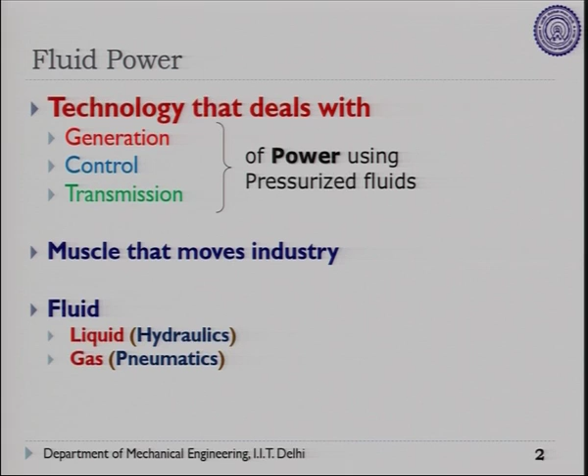In between that you have to exercise the controls. So we will be discussing generation, controls, transmission, and in between there is a control of power using pressurized fluids. When we talk about liquid, we call it hydraulics, and whenever we talk about gas, it is pneumatics. So let me just pose a problem to you.

In this case, sometimes it may be a conveyor, or sometimes it may be a different system. So this is basically a simple problem. If I have to attempt this, if I have to design a system for this, how can I proceed?

So I just want to have some input from your end, then I will guide you. If I have to design a system like this, where I have boxes stacked, I need to control two actuators, definitely two cylinders in this case, and then it will push it.

Then after the first cylinder extends, I have to extend the second cylinder. I am just talking about the common approach.

So let me talk about the system. So I need to have some source where I have to generate the fluid power. So then, let me start with a pneumatic system.

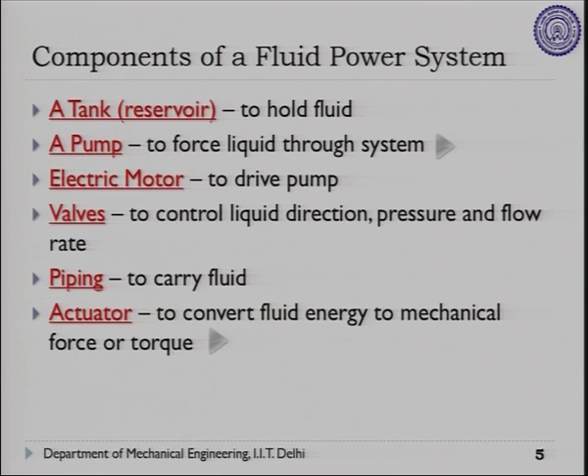So let me take a quick look at this. So hydraulic system, if you see, I will be starting with a reservoir, then there is a filter required, then there is a pump driven by electric motor. You require some kind of a pressure regulation. So pressure regulator is there or relief valve is there. After that you will be having a control valve. So there you have options to control the system.

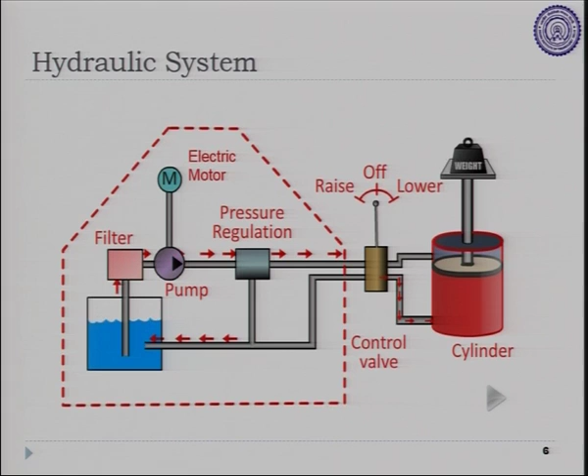There are 3 options shown over here: raise, off and lower, and then you will be having an actuator which is doing the actual work. So it is a conversion of a fluid power to the mechanical. So this is a basic hydraulic system, and if I just take you to the pneumatic system, the only change you can see here is compressor, and after that you will be storing the compressed air. So reservoir is coming after the compressor, right, and then you require something for treatment of the air.

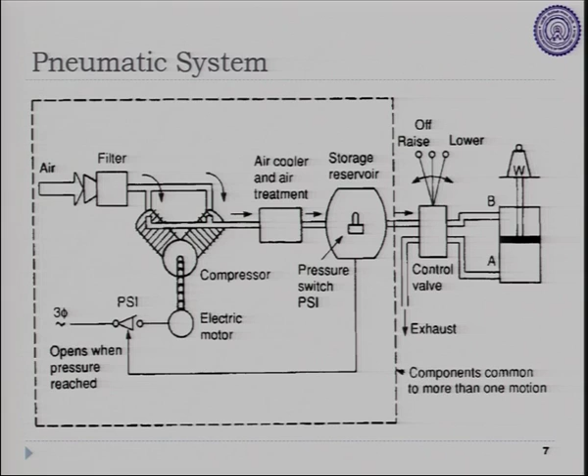Why we need to treat air? Impurities. And what are impurities? What is the major impurity in the air? Moisture, correct, because it will clog the valves and damage them. So we need to take out the moisture and push the dry air into the reservoir, right? So I think that is the common pneumatic system.

So let us come to the control components. So 3 basic types of control devices. One is to control the direction, so we require direction control valve, right. Second is to control the pressure, so we require pressure control valve to protect the system, to limit the pressure in the system, and third is to control the speed, we require flow control valves, right. Let me just quickly show you a small video here.

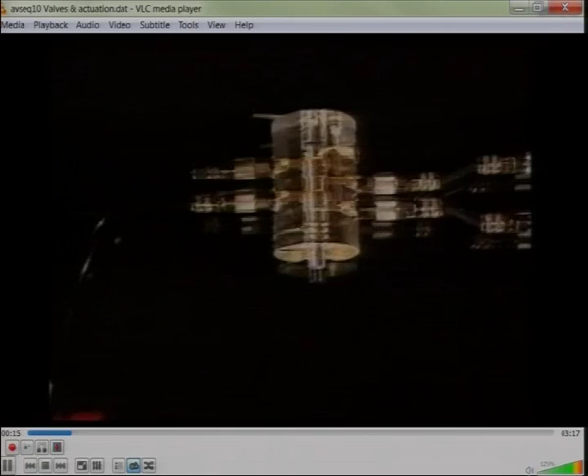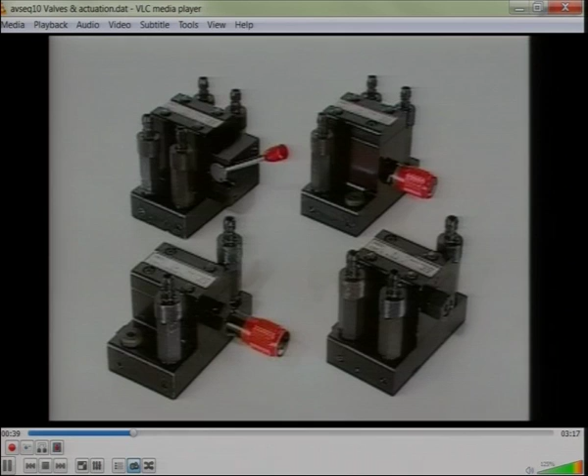Designing a hydraulic system, we saw that between the power supply unit and the drive unit... So this is the actuator, and then there is the valve. The power control section makes sure that the system actually performs the functions for which it was designed. Valves are the components in the system that control the energy flow, that is, the oil flow. This makes them a kind of interface between power supply and the drive unit.

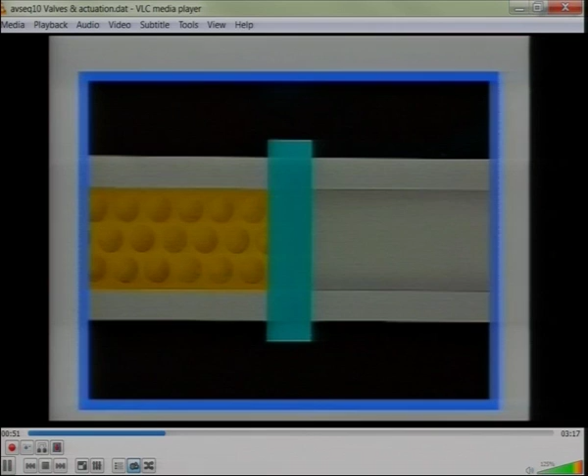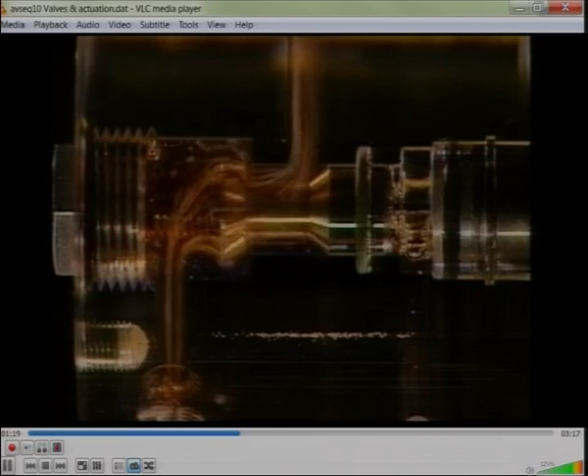They open the flow path or they close it. They direct the oil flow. They regulate flow rate and oil pressure. Valves come in the form of poppet valves. So this is a poppet valve, you can see the way it has opened, now it is closed. So there is a moving element which rests against the seat, and then there are slide valves, a spool type of valve. So by just sliding the spool you will be able to block and open the ports, right.

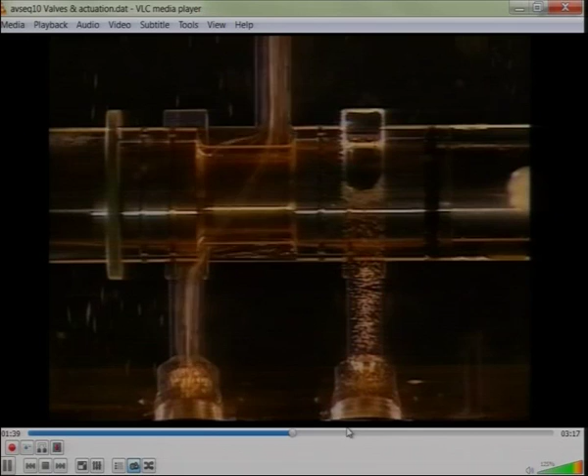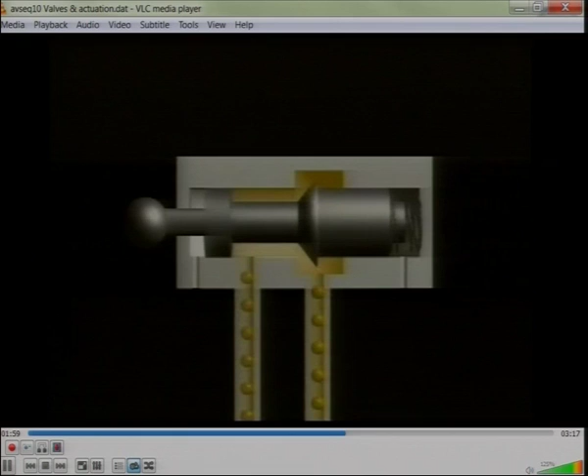In poppet valves, a sphere or cone is pressed onto the valve seat, closing off the flow passage. Poppet valves are tight sealing and designed mainly as 2- and 3-way valves. In slide valves, pistons open or close flow paths by moving back and forth, thus sealing off or opening bores. The piston needs a certain amount of tolerance, which is why this type of valve doesn't seal as tightly as poppet valves, so they're only used for pressure of up to 315 bar. Slide valves can open or close several flow paths at once.

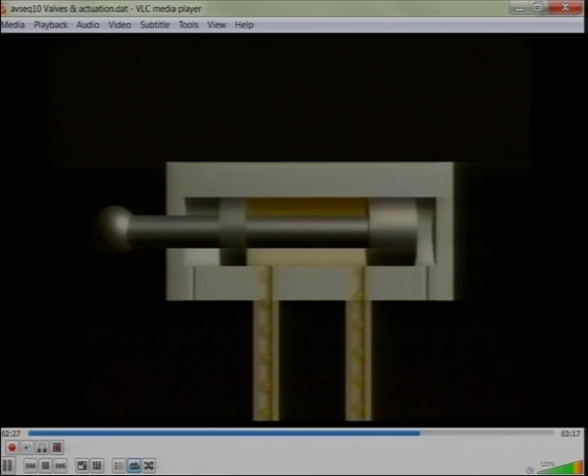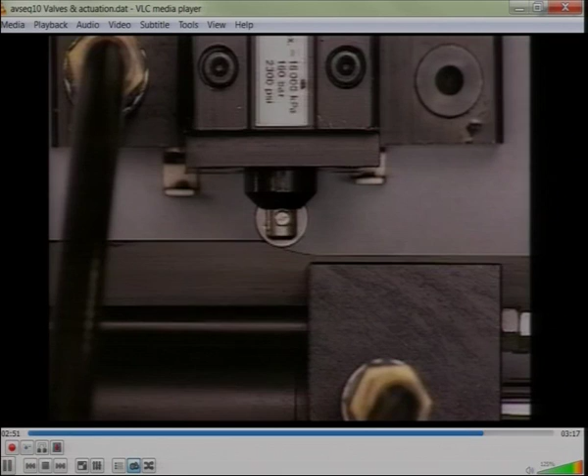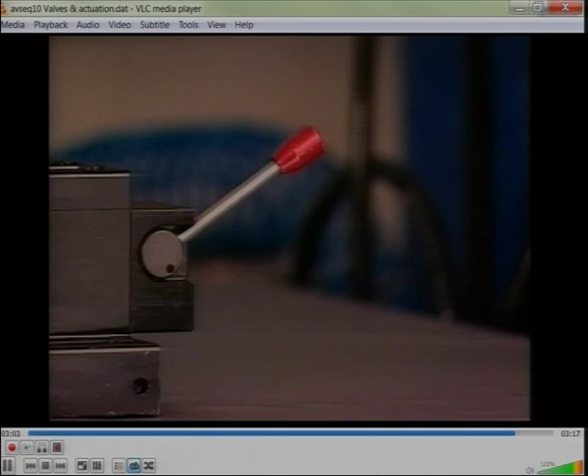There are various ways of actuating hydraulic valves. Manually by lever, or by foot pedal, mechanically by roller lever, or by spring, or electrically, as in the case of these solenoid valves.

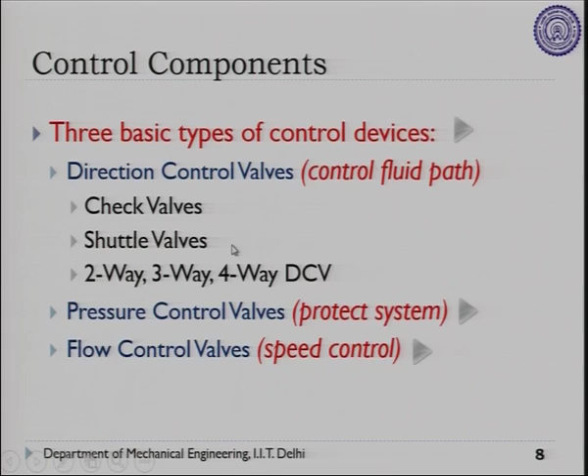Fine. So you have seen the direction control valves. Let me just take you to the slide now. So when we talk about direction control valve, we are trying to channelize the flow of the fluid in a particular direction. So if you see here, there is a spool of a variable diameter, and whenever you slide this spool, it will be opening and closing the ports on the valve body.

So there is a valve which has a body on which there are ports where you will be connecting your outside elements through tubings, and there is a spool inside it. So whenever you slide the spool, you will be able to open and close the particular ports of the valve. You have already seen these modes of actuating the valve. There is a manual mode through lever. Mechanically you have seen through the roller.

Now let me just quickly explain the symbol, how to make a valve symbol. So that will be useful for you. First thing is position. How many minimum positions can the valve have? How many maximum? 3. So a valve can be either a 2 position or 3 position. It means that the spool inside the valve can have either 2 positions or 3 positions. So depending on the number of positions in the valve, we will be making the number of boxes in the symbol. So let me just quickly draw that.

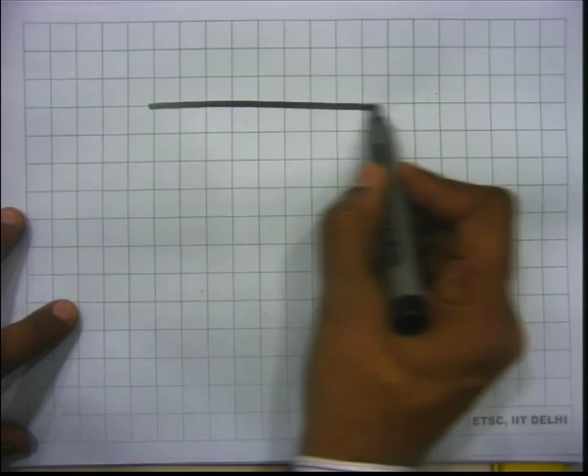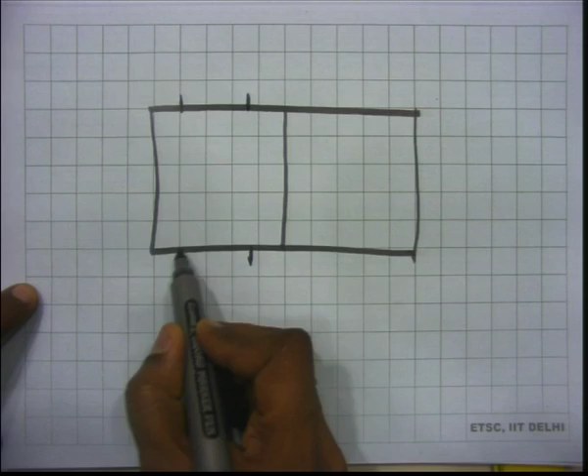If I have to make a 2 position valve, I will be making 2 boxes. It means 2 positions I am representing by a symbol. So it is a 2 position valve. Then there are certain number of ports on the valve. So that will be denoting ports on the valve. So suppose let me just draw 4 ports on this valve, through which you are connecting external elements to this valve.

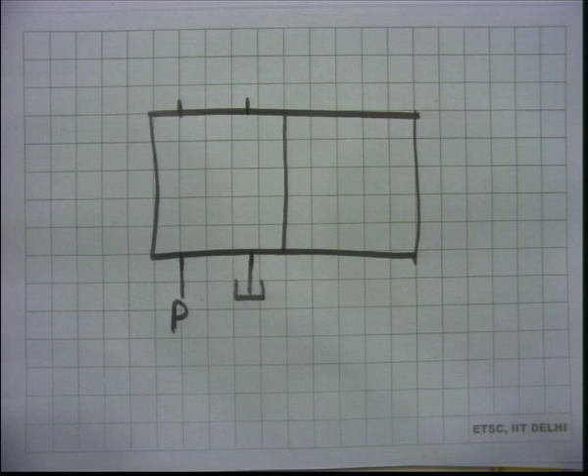Out of these, the 2 bottom ones: through one you will be delivering a pressurized fluid through the valve. So I will be connecting this to the pump, and we call it P. So pressurized fluid is coming inside the valve through one port, and on the other side you will be draining the fluid back to the reservoir. The other 2 ports of the valve will be used to connect to the actuator. So then you can have an actuator, and then I will be connecting these 2 ports to the actuator.

So whenever we draw a valve symbol, we always try to show connections to these ports in a default position. That is the first thing you should understand. So when I draw this valve symbol and I have connected actuator and pump on this side of the symbol, it means this is the default position of the valve. We always show connections to the default position. So whenever the system is not in operation, whenever your circuit is not working, or when the valve is not actuated, this is the default position of the spool.

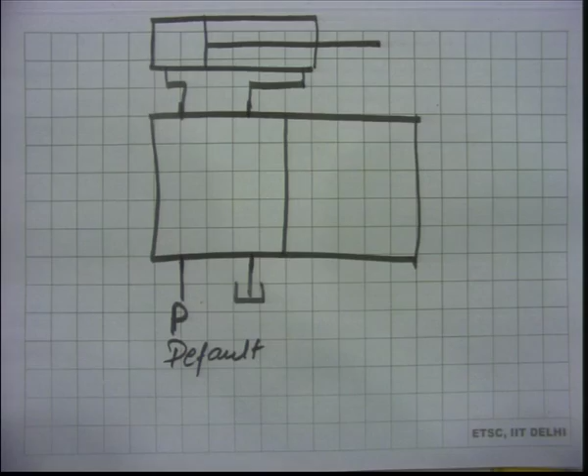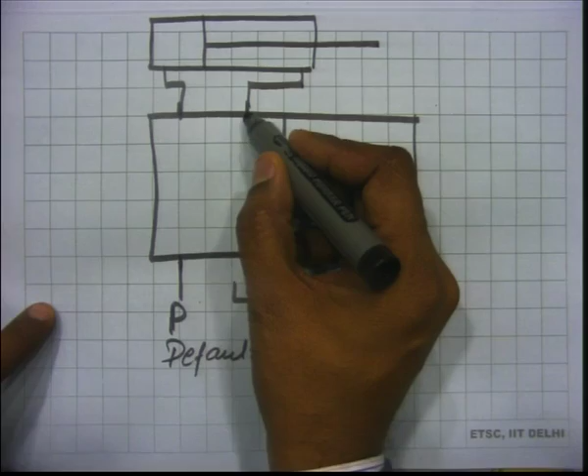There is another box shown over there. This box shows the actuated position. Now, what is the difference between the default position and the actuated position? What exactly gets changed? The direction of flow will get changed. So, if I have to retract the cylinder, in a default position, can I draw the arrows inside this? So if I want to retract, I will be connecting the pump line to the other side of the cylinder and then draining the other side of the fluid to the reservoir. So, I will draw arrows like this.

It means that in the default position, the pressurized line gets connected to the rod end of the cylinder and the other side of the oil will come back to the reservoir. So whenever the system starts, it will retract the cylinder. What would be the symbol inside the other position? Can you draw on your sheet? Yeah, parallel lines, and especially the direction of arrows I want to see. Just do that, because if you understand this, you understand the valves.

We are not marking any port on the other part of the symbol. We are assuming that those 4 ports are fixed. Now, if you just correlate with the physical component, the valve body is fixed, valve ports are fixed, they are not going to change. Only thing that is moving is the spool inside the valve, right. So, the changed connection when the spool moves to the actuated position, we will be drawing those arrows into this.

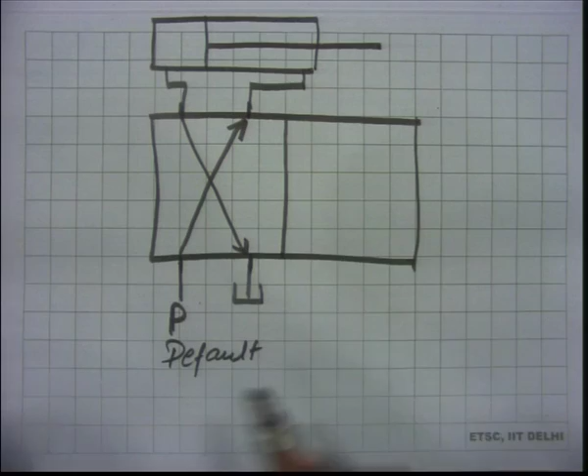So, first position is basically to retract the cylinder and in the actuated position I want to extend the cylinder, right. To extend the cylinder, we are assuming that pump is here, tank is here, it is already connected. So, pump will provide pressurized fluid onto the piston end of the cylinder and at the same time I will be draining the oil from the other end to the reservoir.

So, when I draw these 2 arrows on the second position, that is the actuated position, my valve symbol is complete. So, that way by just looking at the symbol you can understand what is the direction of flow when the valve is in default position and when the valve is in the actuated position. You can understand the motion of the actuator with this, fine.

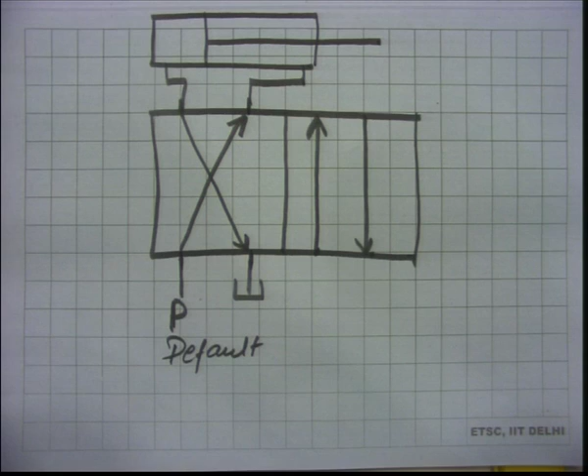Now, what is missing on this valve symbol? Yeah, mode of actuation, how this spool is getting shifted. So, there are 4 modes as I have shown in the slide. You can denote the actuation on this side of the symbol. So, if I am going to control this with the pilot pressure, I will be making a dotted line and similarly I will be making a dotted line on the other side. So, this is one mode of actuation.

Same way you can have a solenoid symbol on this side. So, wherever you are having this actuation, that particular position is controlled by that actuation, fine. So, this pressurized line will be making this side of the connection, and whenever the pressurized line is connected to this side, then these are the connections made, fine. So, that way you have to draw a valve symbol depending on the positions.

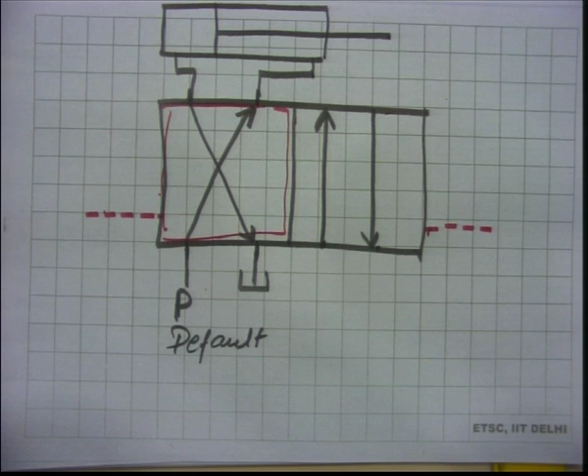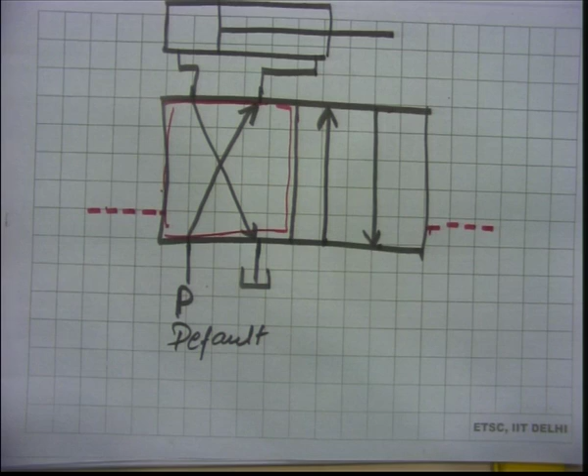Now, if I have a 3 position valve, what is the third position? Center position. So, one is left, another right and third one is the center, it is a neutral position of the valve, fine. Because in this case you cannot stop the cylinder in between, you will be either extending or retracting. There is no third option. If I am lifting a load, I cannot stop in between somewhere, there are only 2 options available.

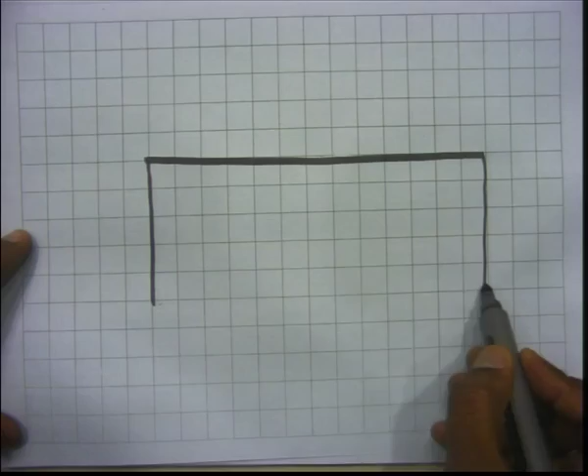So, sometimes we require to hold the load in between and for that we require a third position, fine. So, let me just draw a 3 position. Can you draw on your sheet the 3 position valve for the same task? So, once we know there is a 3 position valve, we will be drawing 3 boxes. These 3 boxes denote the 3 positions.

So, where exactly will we draw P, T, A and B? Center, because that would be the default position. So, I will be drawing P, T and then A and B. These are the 4 ports on this valve. So, I will be drawing like this, right. And then these 2 left and right positions are the actuated positions.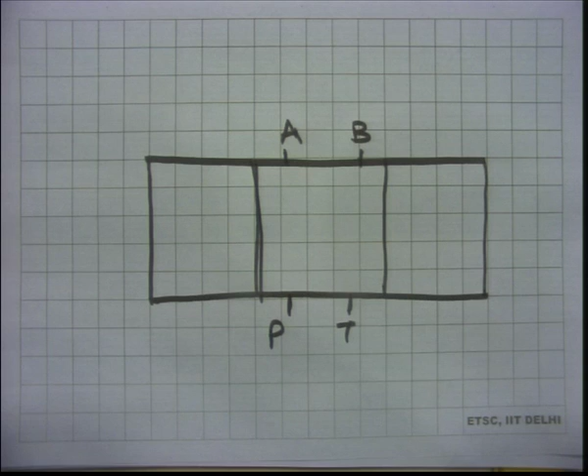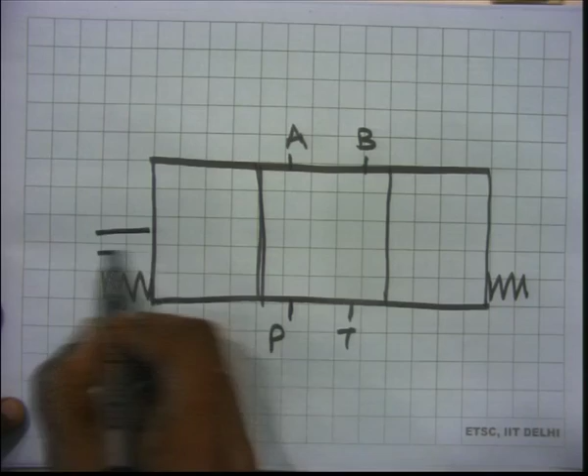So, how is the spool maintained in the center position? You require two springs at the two ends of the spool. So, one spring will be on this side, another spring on this side, right, and then you can have a manual lever for this. So, I will be drawing the manual actuation, or there may be some other type of actuation. Because of the two springs on the spool, the neutral center position is maintained, fine.

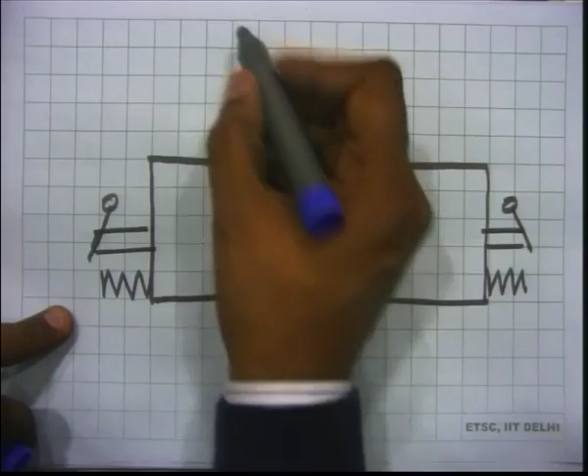Now, can you draw the arrows inside these three positions if I am having an actuator connected to A and B? Can you just draw that? Please complete this valve symbol, so that I will be stopping the actuator in between whenever there is a neutral position, and of the other two positions, one will be extending. So, I can write this will extend the actuator and this will retract the actuator.

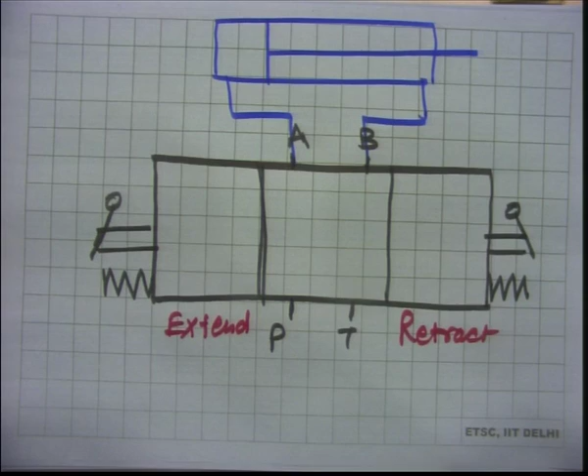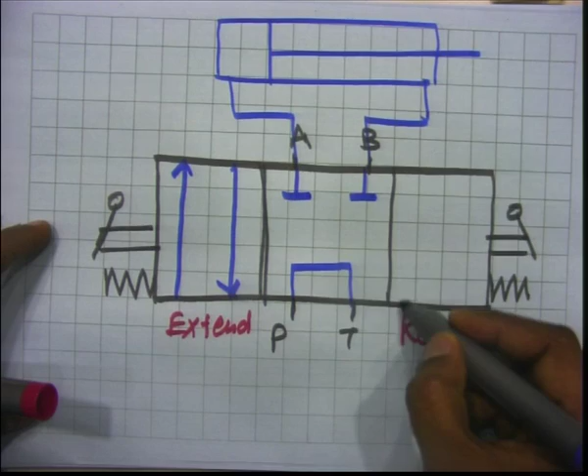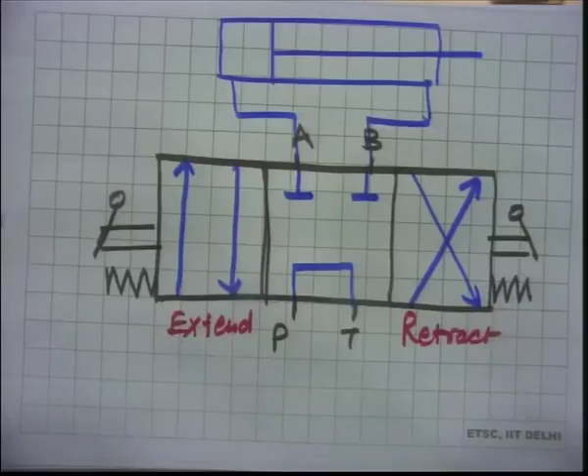Done? Done? So, this is what I assume you might have drawn, fine. So, now you understand how to draw a valve symbol, it is quite easy. Nomenclature we need to understand. When I say 4 by 3, what do you understand by a 4 by 3 valve? Yeah. So, first, can you name this? This is 4 by 3.

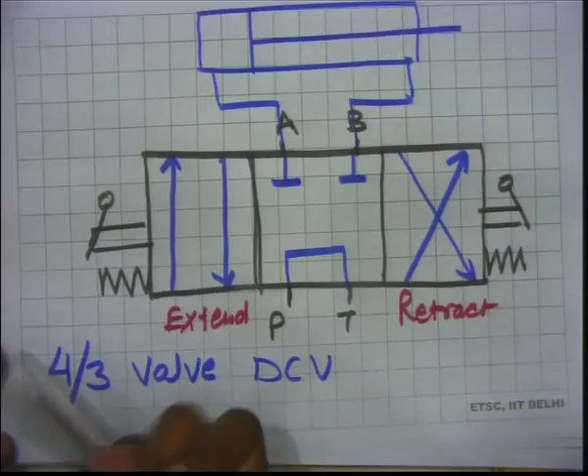DCV, it is a direction control valve. 4 by 3, 4 denotes the ports. So, the first number denotes the number of ports on the valve, and the second number denotes the number of positions of the valve, correct.

So, 4 by 3, by just looking at the valve you can see the number of ports. Can you see the positions inside the valve? Can you see position inside the valve? Yeah, so that is the reason that symbol is always there on the valve. So, whenever you do lab, please have a look at the symbol on the valve, then you understand what exactly this type of valve is. So, how many positions are there inside the valve, fine. So, this is clear, direction control valve you now understand.

Let me come to the circuit, or I should say control system. So, when we say hydraulic and pneumatic control system, what exactly are we drawing in the circuit diagram? This is basically a signal flow in the pneumatic system or hydraulic system. There are certain inputs it requires, either in the form of a valve, push button valve, or maybe a control valve. So, some signal inputs are there, then you will be combining these signals together, doing some kind of processing, and then the decision will be communicated to a signal output section, and finally the command will get executed, fine. So, this signal output is basically communicated to the direction control valve, fine.

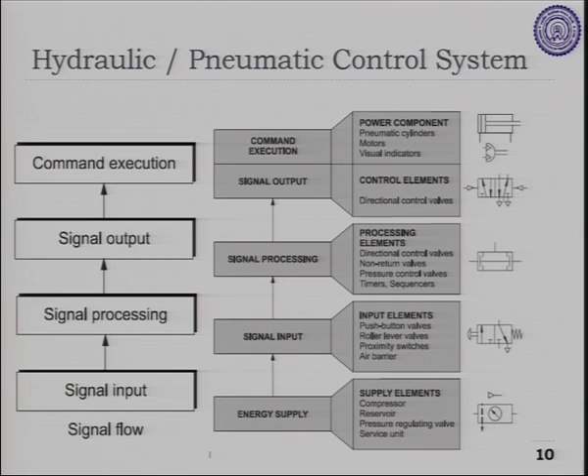See, in electropneumatics and pneumatics, the power section will remain same. Power section means the fluid power section will remain same. That is the reason we are saying pneumatics and hydraulics. Only the signal control section will change, fine. So, the power section will remain same and the signal control section will change, meaning how you are combining the signals and how you will be communicating the signals, right. So, that will get changed.

What is the interface between the signal control section and the power section? What is the interface between a signal control section and a power section? See, as I mentioned, the power section is basically the fluid power section, and what is the component between the signal control section and the power section? That is basically whatever you are communicating as a decision, and it will be an interface between the signal control and power. Which valve? Solenoid valve. Direction control valve is basically the bridge.

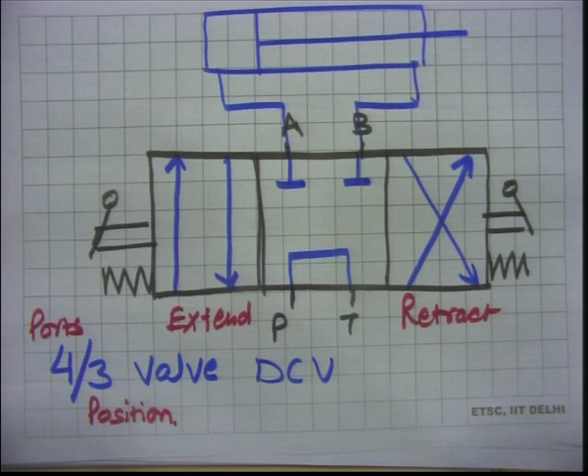Direction control valve is basically acting as a bridge, because through the direction control valve we are providing pressurized lines. If you see here, these two are the pressurized lines connected to this direction control valve, and at the same time we are also communicating the signals. In case of manual actuation, signals come in the form of manual force. Whenever I control the direction control valve movement with pressurized fluid, that pressurized line communicates the signal, and whenever I use electropneumatics, I will be using solenoids. These solenoids communicate the electrical signals, moving the spool inside the direction control valve, which will control the power section.

So, the cylinder is on the power section side, so it will be moving back and forth, but the control of that cylinder will be done by the direction control valve, and the signal control section is communicating the decision to the direction control valve. So, the DCV is basically acting as a bridge, I should say interface, between the power section and signal control section. So, that is the idea of showing this figure.

So, let me quickly show you a circuit. Now, you can see all the components marked over here. There are supply elements, or I should say generation elements, in the circuit diagram. Then we will have some input elements. So, what are the input elements in the pneumatic system?

Input means how you will be communicating your inputs to the system. Compressed air you are not going to provide. Push button valves are there. So, when we say push button valve, why am I not saying push button switch? See, because when we talk about pneumatics and hydraulics, it is always a valve.

Valve means the same direction control valve, where you will be having some incoming lines and some outgoing, and then you will be applying a force or some kind of input. So, push button valve means through the push button you will be moving the spool inside the valve, and that will be controlling the output from the valve. So, then you will be having input elements: push button valve, roller valve.

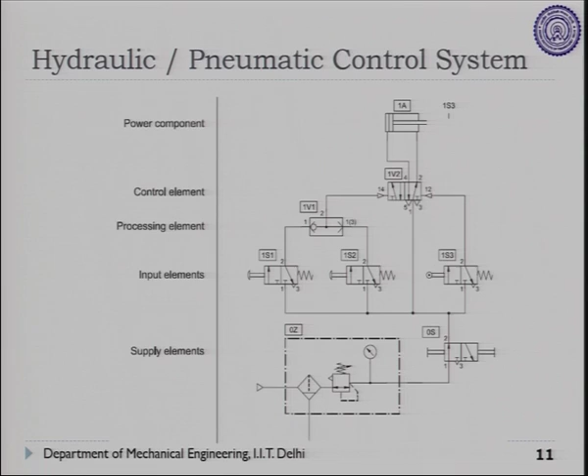Let me show you a more realistic circuit diagram over here. So, if I have to draw a circuit diagram to control the movement of a punch, so that I can make a shape, sheet metal deformation. So, in this case you will be having a reservoir, starting with the symbol of a reservoir. I am just explaining how to draw a circuit diagram.

So, in this case you will be starting with a reservoir, then you can draw a strainer here, there is a pump, there is a motor, then finally you will be taking this to the direction control valve, and the other side of the direction control valve is the actuator, and then you will be having some punch connected to this, and there is a die on the other side. So, let me just come to this diagram, and the red button you can see now.

You have to basically draw the symbol of A, the symbol of B, and the symbol of C. For your help, it is already mentioned that A is basically a 5/2 pneumatically operated, or I should say pilot operated, direction control valve. So, it says 5/2. Then the push button valve is 3/2. So, B is a 3/2 push button valve, and C is a 3/2 roller valve, roller lever valve.

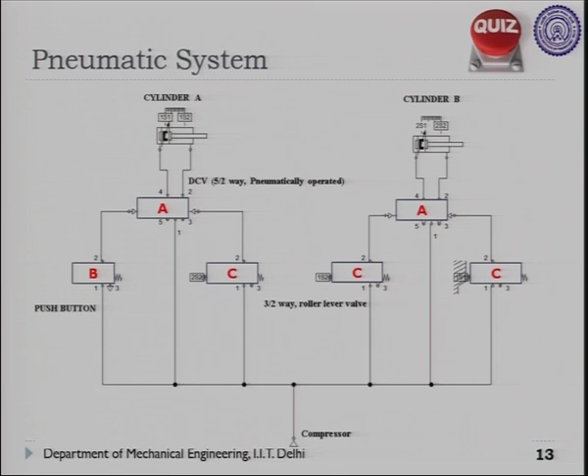So, this is one that is coming from a compressor. If you see here, there is a compressed air line coming to this valve as 1; 2 and 4 are on the cylinder side; 3 and 5 are basically exhaust. So, the same 5 ports you can see on the other position also. So, this is the default position in this case, and then you can have another position here also. So, just make 2 divisions of this.

When I say push button valve, it is basically 3/2. So, there are 3 ports, 1, 2 and 3, right, and it is 2 position. So, you have to draw arrows inside this.

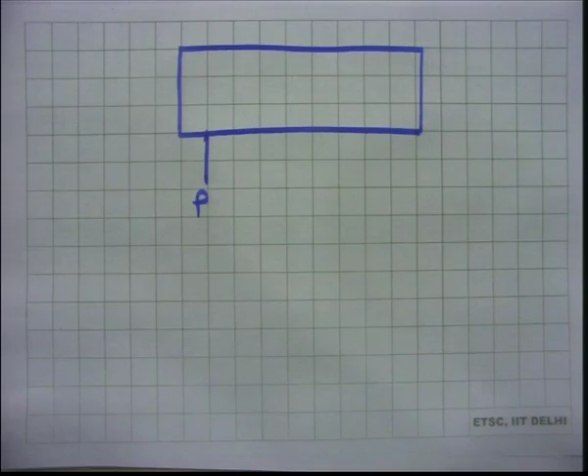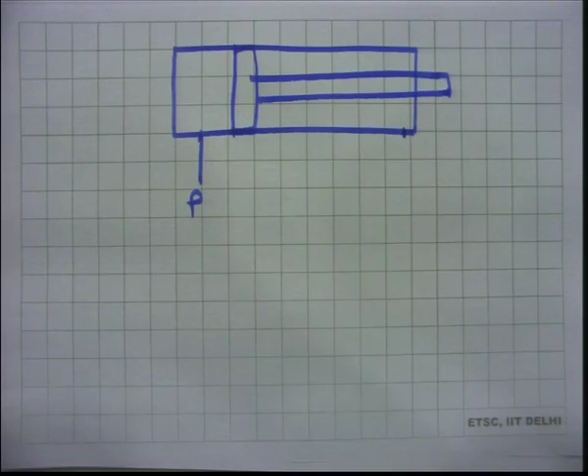Single acting is basically, if I show you here quickly, we will have only one port to make the oil flow inside the cylinder, or the pneumatic line is only one. So we will have only one line on the cylinder, and the other side you will only have a bleeding port or exhaust, whatever you can say. So if something leaks out, then it can, otherwise you will not be able to move the cylinder. So this is basically single acting, because you have only one pressurized line connected to this actuator.

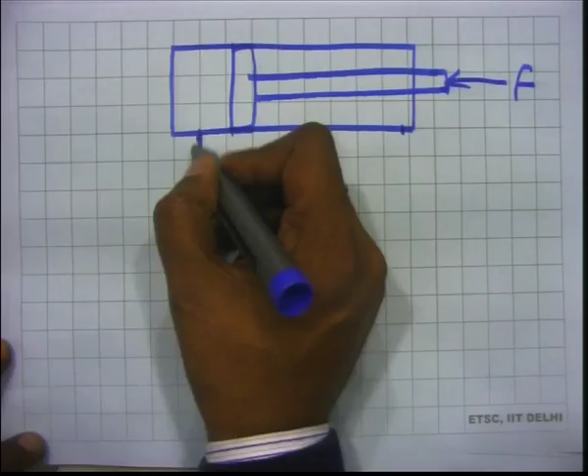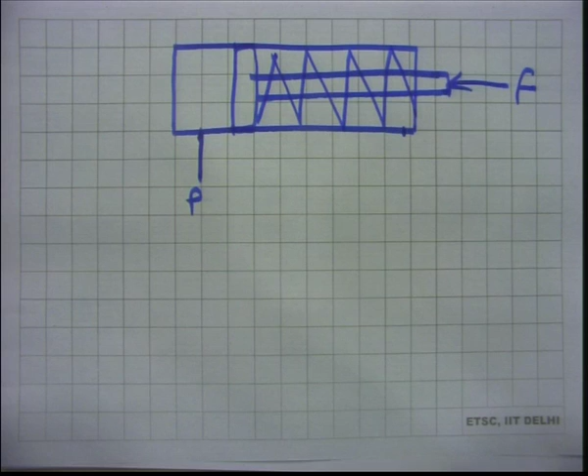So if I have to extend, I have to provide pressure to this cylinder, but how will I retract it? Suppose if the spring is not there, because of the load, because of the external force, it will retract. So there will be an external force on this side which will push the piston inside the cylinder. So I can only extend this, and the retraction is with the help of a force. That is one case. Another case, you have correctly identified, there will be a spring on this side. So whenever you provide a pressurized flow inside the cylinder, it will compress the spring, and as soon as you release the pressure, it will go back. So that is the single acting cylinder.

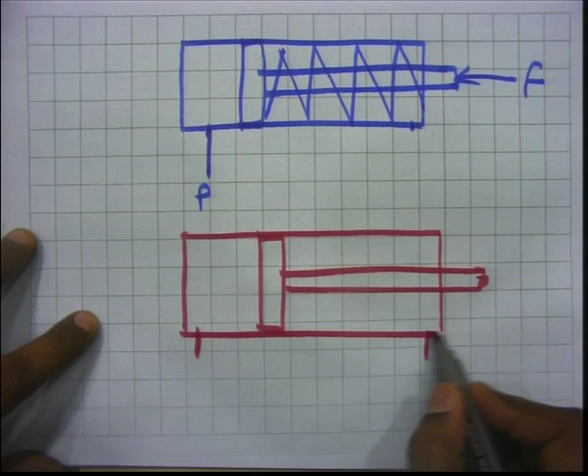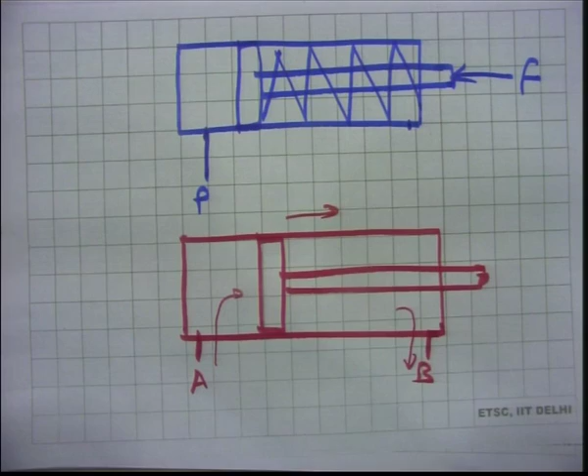In case of a double acting cylinder, we will have two ports, so that we can freely control the movement of the actuator. So I will have two ports onto this cylinder, A and B. In this case, whenever you are making oil flow from A inside the actuator, I have to drain the oil from the other side, and this will extend the actuator. Whenever you want to retract it, you have to make the oil flow from this side and it will come out from the other side. And that is the reason you have seen that in the direction control valves you will have A and B, both ports are there.

But in some cases, if you see here in 3/2 valve, if I show you here, in the 3/2 there is only one line coming out of the valve. So normally we will be using that to control the pilot line or for single acting cylinders. So 3/2 normally we use to control single acting cylinders, and whenever we have double acting cylinders, we will be having 4/2 or 4/3. So that is how different actuators work.

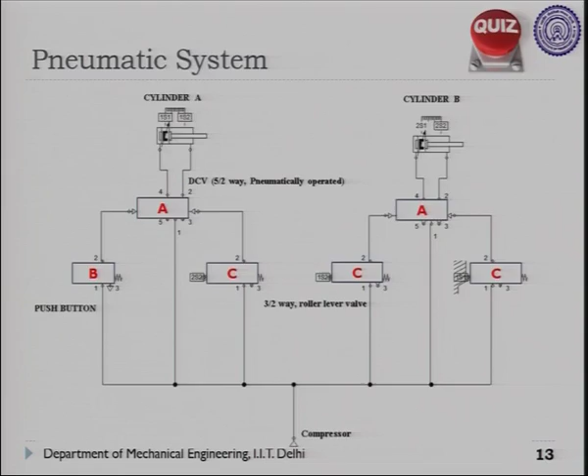Now we will quickly have a look at the design parts. Functional requirement is one part, because we have to identify the suitable control valves and connect them the way we want the functions to be performed. So you will be drawing the reservoir, a strainer, a direction control valve, and finally the actuator. So all hydraulic and pneumatic circuits look the same, only depending on functionality you will be selecting different type of control valves. Now once I have the functional design available with me, once the functional design is ready, how can I identify the specification, how can I freeze the specification of different components?

Suppose if I take an example of this system itself, if I have to design a press and then design a hydraulic system for this particular press, how will I finalize the specification of the actuator, what pump will be required, how will we decide the specifications of the pump, and the direction control valve we have already decided. So we will start with the specification of the job. So suppose if I ask you to design this system, what exactly do you require, what exactly should you know? Force. So specification of the job is one thing that you are knowing, or it may be given to you as a specification. Now after that you have to calculate or find out.

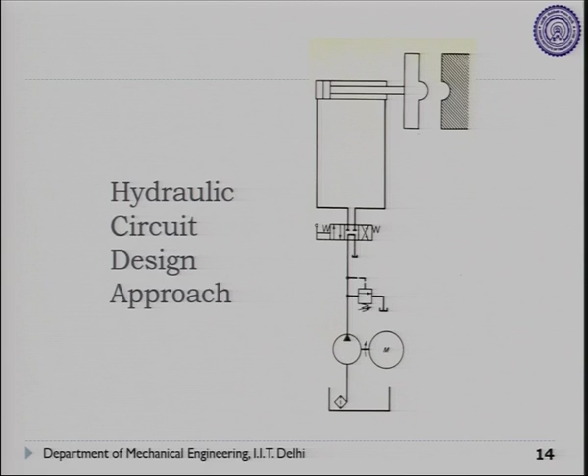So, these are the two specifications, one is the bore dia and another is the stroke length. These two things you have to find out. How can you find out those specifications? Let me just give you a problem, since we have shortage of time.

Please write down this basic specification given here in the same circuit which I have shown you. A sheet metal forming press, as I have shown, there is an actuator, a punch and die. The shape is to be formed as a hemispherical cup of radius 15 centimeter in 2 mm thick mild steel sheet. Force required is 8 kilonewton in this case.

The forming hammer should approach the job from a distance of 30 centimeter. So if I just see that, I am having an actuator, this distance of approach is 30 centimeter, and the production rate given is 240 components per hour.

Now I have to identify the specification of different components required to make this circuit. So from where should I start? Let us freeze the specification of the hydraulic cylinder. As identified, we need to know the bore dia and the stroke length, so two variables are unknown in this case.

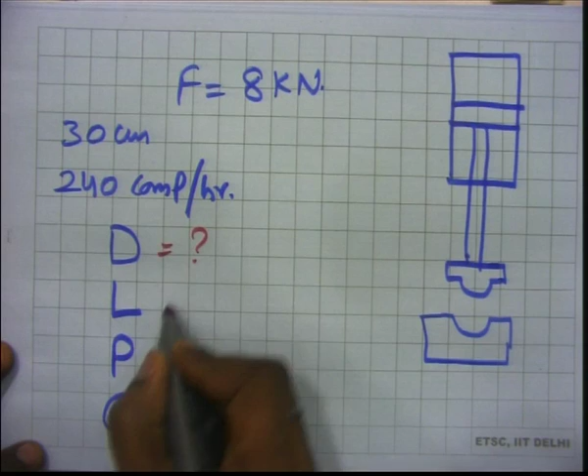It is very basic fluid mechanics, I am not going into detail. So I know only force, in this case 8 kilonewton is required. Now in case of an actuator, either I should know force and pressure, or I should know the dia. So one has to be frozen, out of these two parameters I have to freeze one.

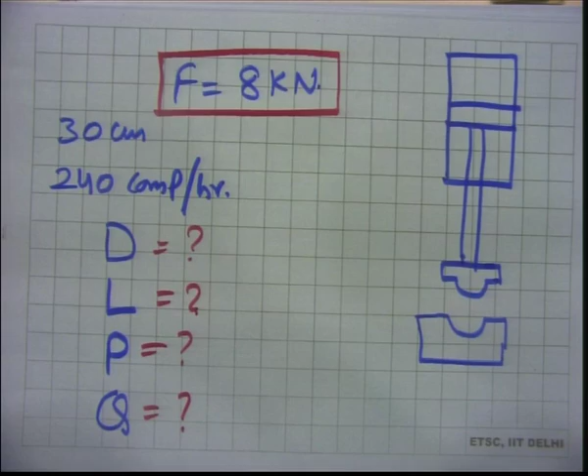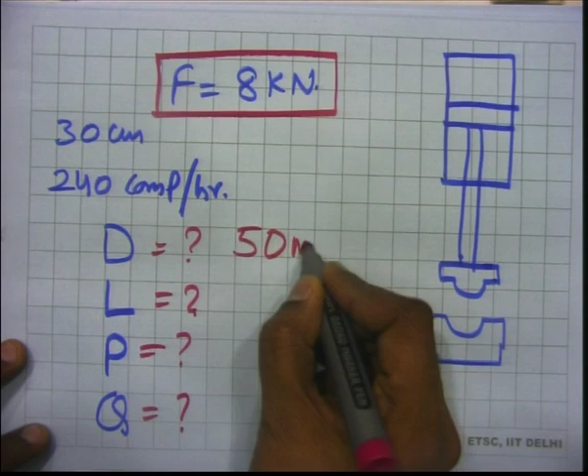We can start with an assumption, whichever is available. Suppose if I already know the pressure I have to work on, I will start with pressure; if I don't know the pressure, I will start with an assumption on bore dia. So let us start with an assumption of 50 mm. I can assume that bore dia is 50 mm, so I will select a cylinder with a bore dia of 50 mm.

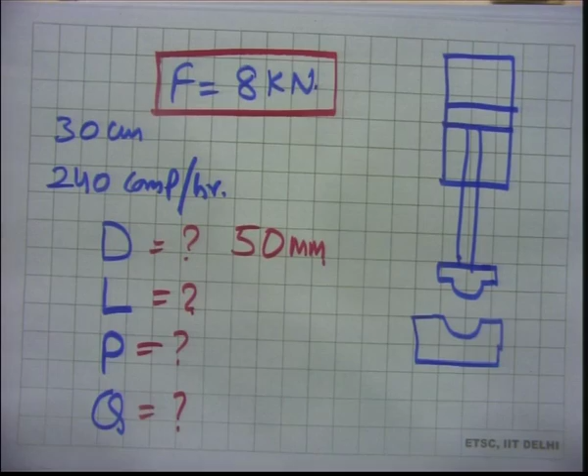As I mentioned, this has to approach from 30 plus 15 centimeter, since this has to be approached from 30 centimeter and the radius is 15. So total travel that the cylinder has to make is 45 centimeter. So I will make this 45 centimeter the length of stroke.

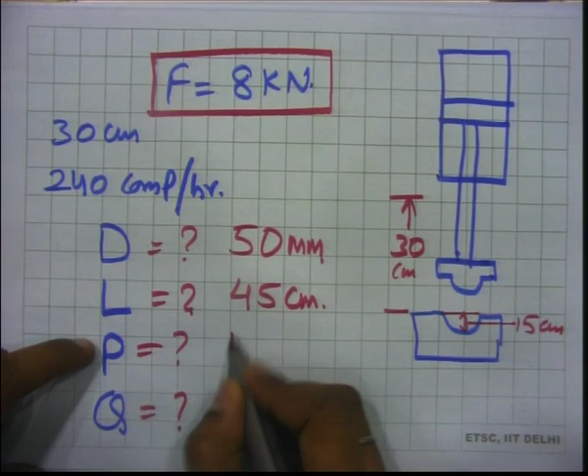Now from this, pressure can be easily found out once you freeze the diameter of the actuator. What would be the pressure? You can just find out force divided by area. Force is known, that is 8 kilonewton. Area you can find out from the diameter known. So pressure can be easily found out by just force by area.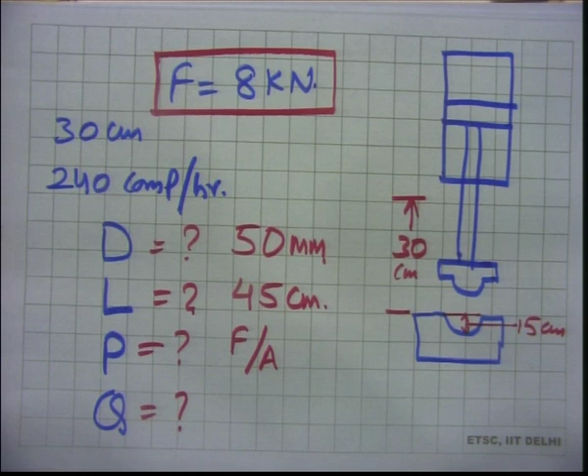How can you find out the flow rate? Number of components per hour are given, that is 240 components per hour. So how much time is available for making one component? 15 seconds is the time to make one component.

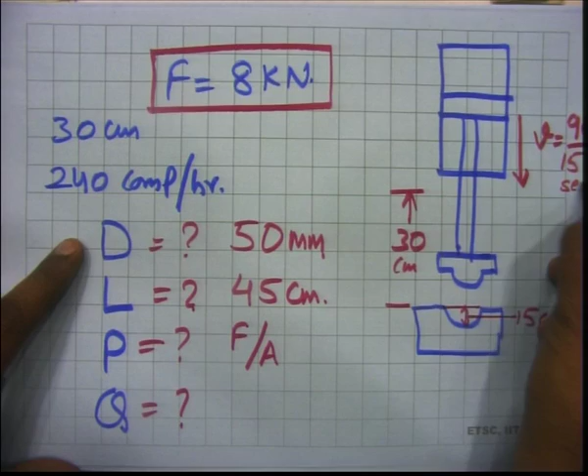And how much distance has to be travelled in 15 seconds? 90 centimeter, because it will extend and then retract. So total 90 centimeter has to be travelled by the actuator in the given 15 seconds. So you can find out the speed of movement of the actuator, or speed of movement of the piston inside the cylinder. V is equal to 90 centimeter, the distance to be travelled, and time available is 15 seconds, so you can just find out V.

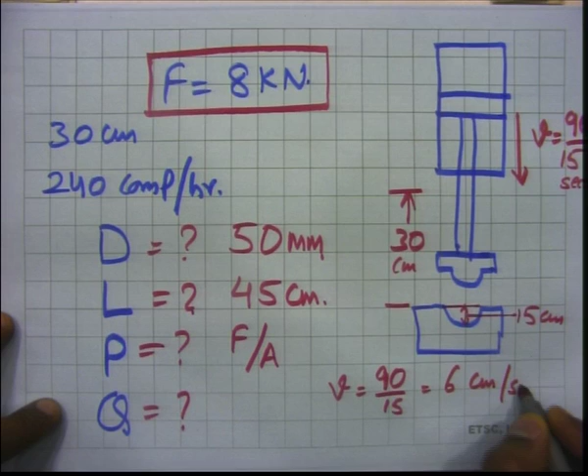So you know the linear speed of the piston inside the actuator, and flow rate will be area into velocity. Area is known because once you know the diameter, this is the area, and this is the linear velocity V. So A into V you will get the flow rate.

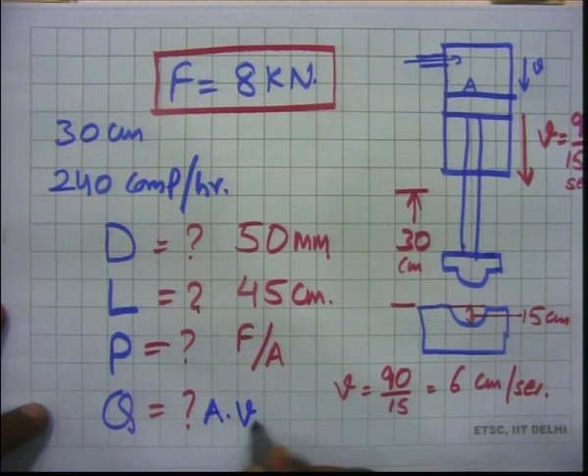Let us come to the problem again. So hydraulic cylinder bore and length you have already found, because D is 50 mm and length is 45 centimeter. So once you freeze the specification of the hydraulic cylinder or hydraulic actuator, next you find out the pump pressure and the flow rate.

So pump pressure is force per unit area, you can find out, and flow rate you have calculated from the production speed, that is the components per hour requirement. So you know the linear velocity and you can find out the flow rate. So pump selection can be done with the help of these two parameters, speed and flow rate, and the pressure, that will help you in finding out the suitable pump for your application.

Electric motor HP - suppose if you have to drive this pump you require an electric motor, and if I assume 75% pump efficiency, then what is the specification of the electric motor? How can I find out what HP motor is required? Because in the market if you go you will ask for a particular horsepower motor. How can you find out what horsepower motor is required to drive this particular pump?

First we should calculate hydraulic power. So first you have to calculate the hydraulic power, pressure into flow rate. So that much power you require to do the job, and how much electric power you have to give as an input, that divided by the efficiency, 0.75. Then you will get the watt of fluid power, watt of electrical power to be given to the pump.

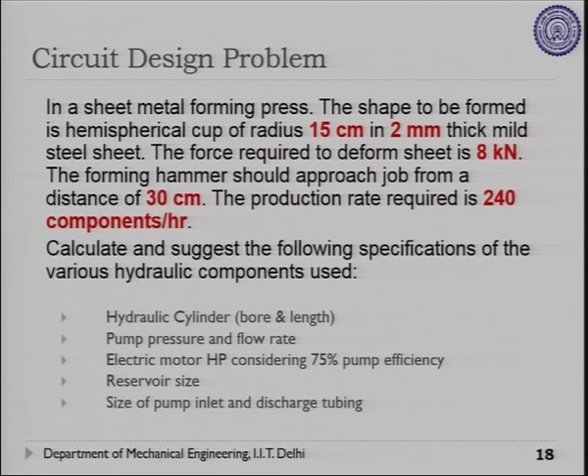Viscous heating may be there. Viscous heating - no, it is related with the oil viscosity, it is not related with the speed as such. If I have a large velocity, then pressure drop is there, and if the pressure drop goes below vapor pressure... so there is a constraint on the inlet velocity and outlet velocity. So discharge tubing has to be decided according to that speed, inlet and discharge tubing has to be decided according to that speed. That way, once you know all these parameters, you can design a system.

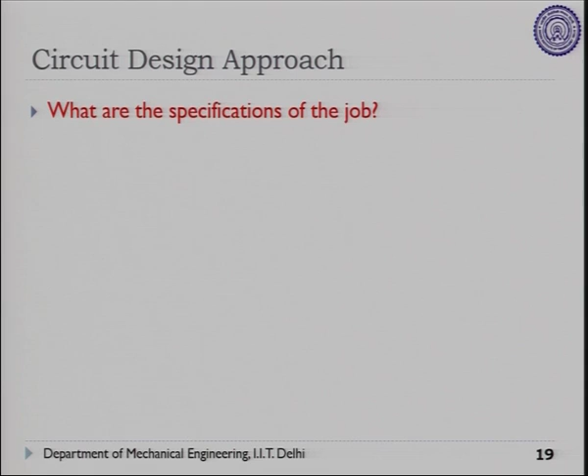That is the idea of showing you this particular problem. So that has been done over here.

Now this is something important because we have started with the assumption that a 50 mm dia cylinder has to be used. I can do the same job with a smaller dia cylinder also, even a bigger dia cylinder also. So there should be some reasoning for making a proper selection.

So in this case if I use a large dia cylinder, then for the same force it will require less pressure, that is the advantage I should see. But for getting the same velocity I need to have a much larger flow rate, right. So that requires a bigger pump for speed, but it can operate at low pressure.

On the other side if I use a smaller dia cylinder, then it operates at high pressure because for the same force you require much more pressure because the area gets reduced, and a smaller pump because the area is small, so to get the same speed you need a lower flow rate. So we have to decide between these two, right.

That has been done, I think that is what we have discussed, and in this case the pump inlet size we can find out by having this velocity: 60 to 150 centimeter per second is the limit on the inlet flow velocity, and on the outlet flow velocity it will be 200 to 450 centimeter per second, right. So from that we will find out the tubing sizes.

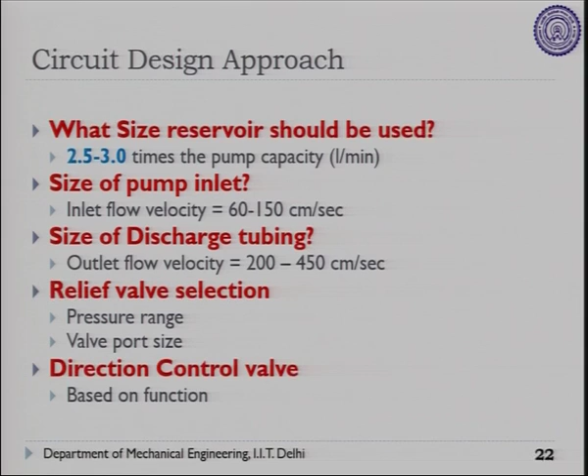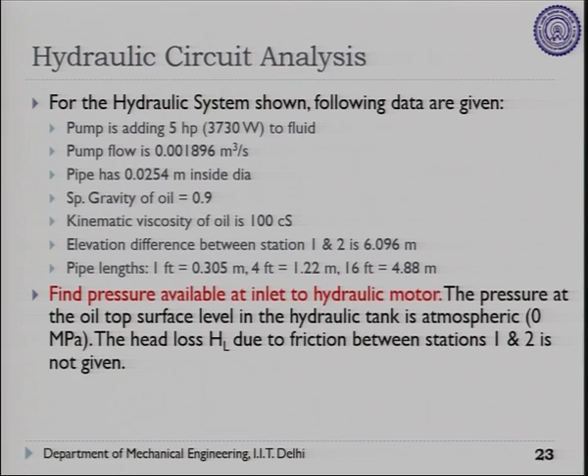So in this case this is a system. Till now we have not considered the length of the tubings, we have not considered any bend in the system, we have not considered any losses in the system, but now we are concerned about the actual pressure to be found in this system.

So if I am interested in knowing the pressure at the inlet of the hydraulic motor, so this is a hydraulic motor here, and I am interested in knowing the pressure that will go inside this hydraulic motor at the inlet. So then I have a pump, I have piping here, I have tubings basically, and then there are different fittings in the system.

Fittings have been used because you cannot just have a straight line pipe going from a reservoir to the pump and then pump to the hydraulic motor. So you will be having some kind of tubing in this case, and then the different lengths of the pipes will come into the picture, right. So in this case we will be calculating the losses, and how will we calculate the loss, which principle will you use?

Too much mechanical engineering? Bernoulli's equation, correct. So Bernoulli's equation we will use to find out the velocity and the pressure, right, and losses we will be calculating using pipe flow equations. Basically the basic pipe flow equations can be used in this case. Through that you can calculate the, it is getting more technical, I think. No problem, fine. So in this case we will be using pipe flow equations to find out the losses.

So in this case I do not know whether you have time to solve this or not, because it requires some background on this. Yeah, so I will not be pushing you to solve it. Before that, I just want to discuss something that I skipped in between.

See, when we talk about the design consideration, when we are designing a circuit diagram, in the morning Professor Vadvaji was just mentioning about the safety. So, before designing a hydraulic system, because these systems are supposed to operate at very high pressure, safety is the prime concern we should start with. It is not only the functional requirement, we have to take care of the safety inside the system design. So, the system design's first consideration is the safety.

What exactly you will consider inside the safety parts, I will just brief upon that. So, ratings: the different components that you will be using, you will be choosing an appropriate rating for the components. Suppose I am designing a hydraulic system to operate a furnace door, my system requirement will be different. Please note that the functional circuit will remain same, but the cylinder specifications in terms of pressure will be different. What is the problem with the cylinder operating in a furnace area and in this room?

Temperature will be high. So it's made of metal. What is the problem? Maybe the property of oil. Expansion. Fire hazards, no? Leakage. Leakage. Why there is more leakage in the furnace environment? Viscosity. In hot condition, the property of oil will change. So, the properties of the oil may get changed. So, one is the specification of the oil, and the seal. Yeah, that is something very important in this case.

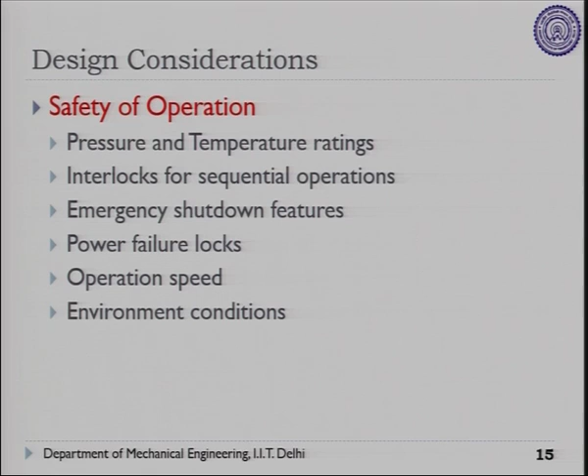So, safety of operation is the first thing that you have to emphasize whenever you design a circuit, and then after that we will talk about the functional requirements. Functional requirement, you will make the required selection, whatever desired component you can have for system functionality. So, it should meet the required performance specifications.

Now, whenever we think about hydraulic or pneumatic systems, they are always a part of a mechanical system. They themselves independently are not doing anything, because once you have an actuator, it will be performing some operation in the machine. So, another very important part: life expectancy is the same as the machine. If I am designing a CNC machine and attaching a hydraulic system with that machine, it should not be the case that during the lifetime of the machine the hydraulic system has to be replaced twice or thrice. Suppose my machine is supposed to work for 10 years, then the hydraulic system should also operate for 10 years.

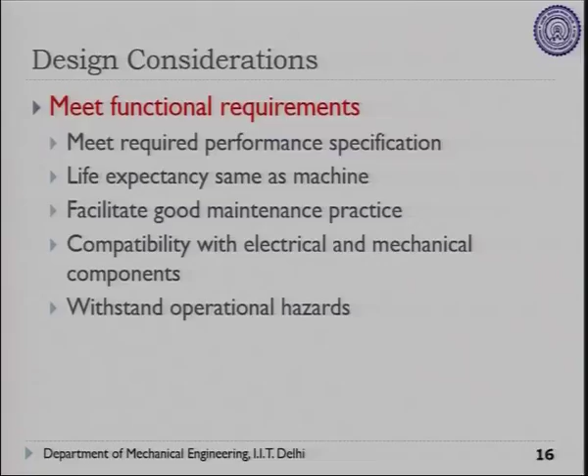Facilitate good maintenance practice: once you assemble all those components, it should facilitate good maintenance practice. Compatibility with electrical and mechanical components, that is very important. When I have a pump and I want to run it with an electric motor, there is the possibility that I will have a single phase motor or a 3-phase motor. So, your system should be compatible. My pump shaft dia is different, my motor dia is different, so you should have a proper coupling requirement.

So, all these specifications you have to take care of; it is not just pressure and flow rate of a pump that will matter, but how you will be driving that pump, the specification of the electric motor. So, the electrical system and mechanical system should be compatible. If my system is supposed to operate at 24 volt DC, then that should be made available in the system. I cannot run the valve with 230 volt AC or whatever source.

So, they should be compatible with each other, and then you have to take care of all operational hazards. You can try to foresee those operational hazards and take care of that in the system design. So, that is the functional requirement, and last comes the efficiency. So, basically I just want to introduce the phases: first we take care of safety, then functional requirement, and then efficiency of the operation.

I think I should stop over here. The exercise sheet has been circulated, or it is with you, because for the exercise we are going to do, we will be going to the lab and doing one simulation of this circuit diagram, and physically you will be making those circuits yourself and making them operational. So, a problem has been identified, the same problem that I was just discussing with you is there on the sheet. So, we will try to attempt the same problem.

First, with this problem we will be trying to build a circuit diagram. Today we will do it with pneumatic components, the same problem we will do with the electro-pneumatic system, and the same problem we will try to solve with the PLC. So, then you will identify the difference between the different components.